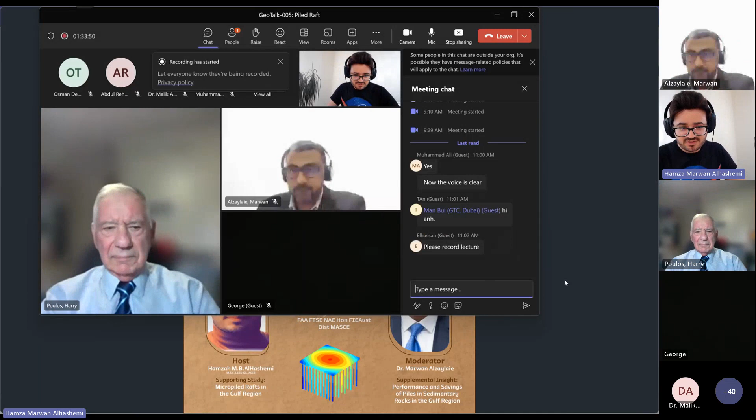Someone is asking for the recording. We already started the recording now, so very good.

2 more minutes to go.

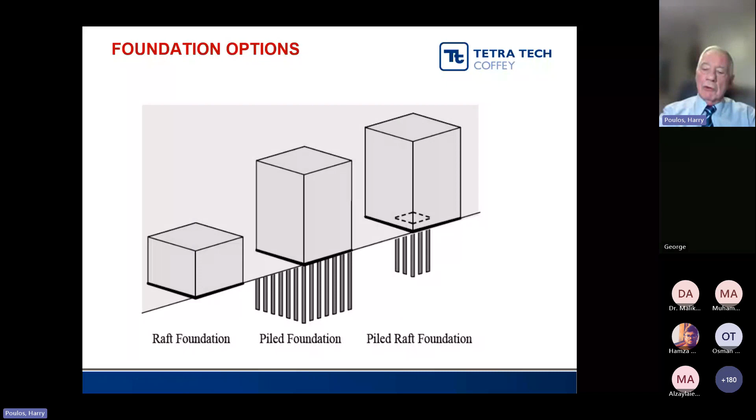Now, the design philosophy tends to be a little bit different from normal piles. We aim to share the load between the raft and the piles, and the piles really take generally the majority of the load, but the raft provides additional capacity, and so we tend to focus more on stiffness and settlement than on the actual capacity of the foundation, because this is often the deciding criterion.

Now, there is another perspective that we can take with piled rafts, and that's to look at the piled raft as a pile-enhanced raft, where we improve its performance by adding a number of piles, and the piles then act as settlement reducers, so that they actually carry the load, and even if the pile capacity is fully mobilized, then the pile can act as a spring and carry some of the load, and so settlement is reduced. So this is the basic way that we can look at it.

Now, the piled raft is not a universal solution to every problem, but there are circumstances where piled rafts are extremely suitable, and that is where the raft itself has a reasonable amount of stiffness and load capacity. This occurs if you have, for example, relatively stiff clay profiles, as they have in the city of Frankfurt in Germany, or where you have relatively dense sands or weak rocks, conditions that you have here in Dubai and in other parts of the Middle East. It's preferable that you don't have a situation where ground movements due to external causes can occur.

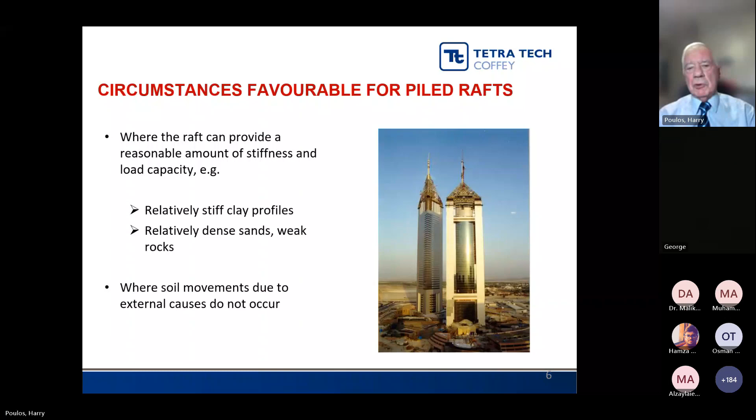So that's circumstances. There are circumstances that are unfavourable, where you have, for example, soft clays near the surface, where there are compressible layers at depth, where consolidation settlements may occur so that the soil may tend to move away. Lifting movements where the soil itself may cause uplift loading on the piles.

So just be aware that we're not talking about a universal solution, but we are talking about a solution that for many cases is extremely favourable, and certainly in your part of the world, these favourable solutions are quite common.

Now, some of the earliest learnings we had were from small-scale model tests that were carried out in the 1950s by Dr. Whitaker. And these two diagrams show the results of model tests where on the vertical axis is the settlement of the model pile group, and on the horizontal axis is the number of piles, the square root of the number.

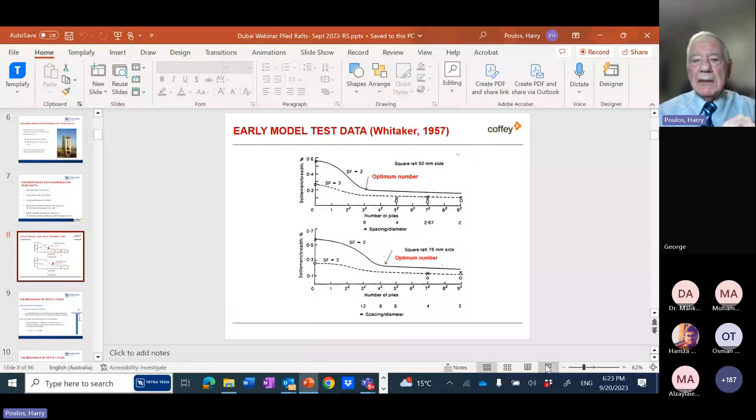Important point here that I want to make, and it is an important point with respect to the design of piled rafts, is that as piles in the group increases, we tend to get a reduction in settlement, which is what you would expect. But there comes a point at which there is little or no further reduction, and that is when the group itself acts as a block. So if the piles are very closely spaced, then really the piles and the soil between them act as a single block. And so there is an optimum number for efficiency of a group of piles or a piled raft. That's an important thing to remember, and we'll come back to that later.

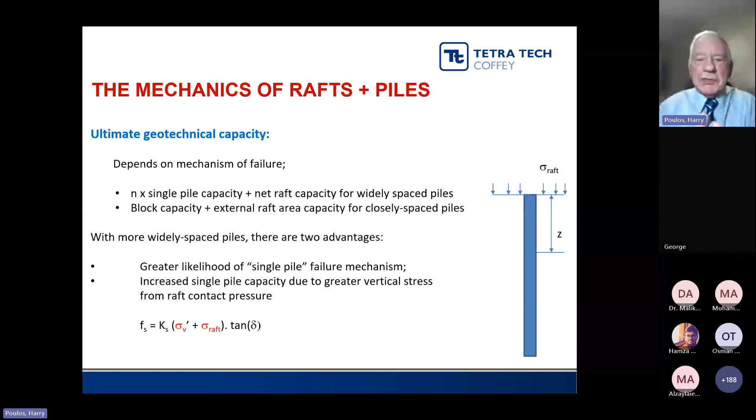Of rafts and piles, first, that the ultimate geotechnical capacity of a piled raft depends - if you have widely spaced piles, capacity is the sum of the single pile capacity plus the capacity of the raft. But if you have closely spaced piles, then the ultimate capacity is the capacity of the block plus any external raft area.

So for widely spaced piles, and this is where piled rafts become really quite advantageous. If you can generate a single pile failure mechanism, you get a greater efficiency of the group, a bigger capacity than you would otherwise.

And another point is that if the raft is in contact with the ground, it will increase the stress in the ground, and it will increase the pressure on the ground, and that will in turn cause an increase in the skin friction.

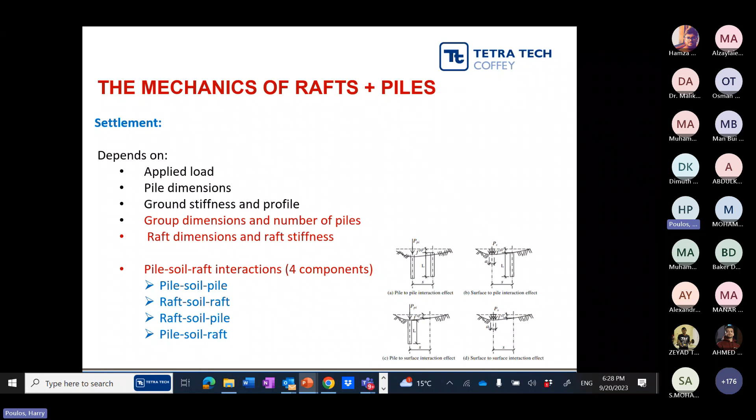It's also very important to understand that we have four interactions among the elements: piles interacting with other piles through the soil, one part of the raft interacting with another part through the soil, and the raft interacting with the piles and the piles interacting with the raft. All of these interactions need to be considered if we're to get an accurate assessment of how the piled raft works. I'll show you later in one of the examples how important it is to take account of all these interactions.

Moving on to design issues, obviously this, as with all foundations, involves considering the ultimate load capacity under the combination of vertical, lateral and moment loadings. Also looking at maximum settlements and differential settlements, and then from a structural viewpoint, looking at the bending moments in the raft, the shears in the raft, and the pile loads and bending moments. So all of these are issues that we have to address.

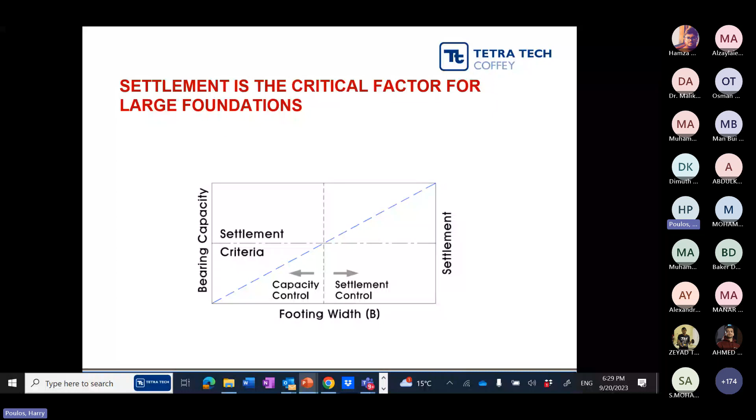Just one diagram here that comes from our Italian colleagues, showing that once we get to relatively large foundations, for example for a building rather than perhaps for a bridge pier, the critical factor for design is not bearing capacity but tends to be more settlement. So we find that the design of the piled raft for normal buildings and larger buildings is controlled by settlement and differential settlement rather than by ultimate capacity.

Now, in our practice, we have various stages of design. We do a preliminary design to try to estimate the number of piles required for both capacity and settlement requirements, and to assess where the piles are best located. Then we get into detailed design, where we refine the pile locations, optimize the raft thickness, and obtain detailed settlement, bending moment, and pile load data.

Here we interact very closely with our structural designers, because they provide us with the loads and we provide them with the stiffness values of the piles and the raft.

Now, in terms of preliminary design, this is when we first start off. We need fairly straightforward, simple methods. For estimating the ultimate load capacity, we generally take that as being the lesser of the raft plus the individual piles, or the block of piles plus soil plus the raft outside the block perimeter. We need to consider the effects of soil layering.

When we're estimating the overall load settlement behavior, we can use simple hand or computer methods, and we can also allow, if necessary, for cases where the piles are fully mobilized, which gives us a means of getting a helpful first estimate of the load sharing between the raft and the piles. This enables us to get an estimate of the required number of piles to satisfy ultimate capacity and settlement criteria.

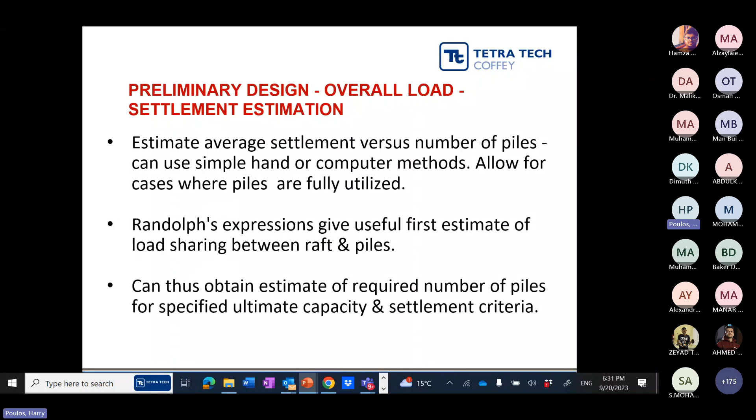Now, we've developed what we call a Poulos-Davis-Randolph method. It gives a very simple approach to getting a trilinear load settlement curve. This requires estimates of the settlement, the ultimate pile group and raft capacities, and the raft-pile interaction factor. Again, with that, I'll refer you to Professor Randolph's 1994 state-of-the-art paper.

This is based on a single unit of a pile plus a segment of a raft, and we can use the expressions that Randolph obtained to get this sort of fairly simple load settlement curve. On the vertical axis we have load, and on the horizontal axis we have settlement. There are three parts to this load settlement curve.

The first part, from the origin to a point A, is where the piles and raft partially behave elastically, so that the piles are working and the raft is working together. When we get to a certain point, the pile capacity can be fully mobilized, and if we load beyond that, the remaining load is carried by the raft, giving a second part of the load settlement curve, until we reach the ultimate capacity of the piled raft system at point B. So that's a very simple trilinear, three-part load settlement curve.

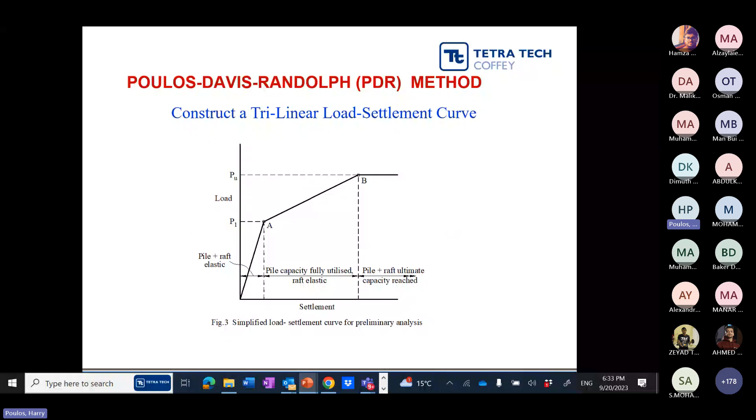This is the one that you can develop with that simple analysis. On the left-hand side, we have the ultimate capacity versus the number of piles for a particular case, and you can see the capacity of the raft alone. As we increase the number of piles, we get an increase in the capacity of the piled raft. At the end, we reach what we call block failure, and then there is no improvement in the capacity of the piled raft if we add more piles.

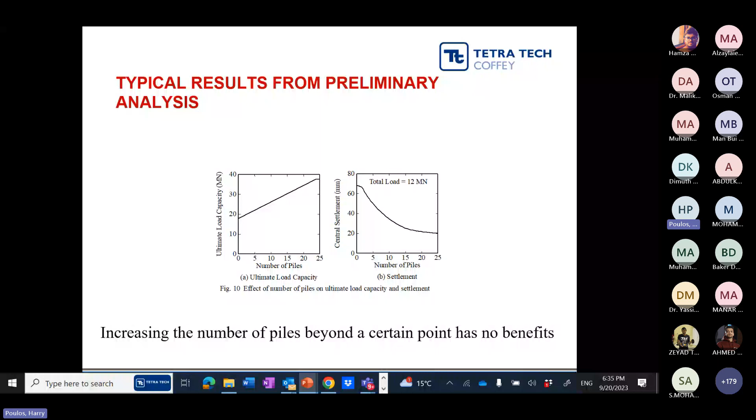We now move on to, again, trying to work out when do we require a pile under a column. And there are four circumstances where you would require a pile.

Firstly, if the bending moment exceeds the allowable bending moment, then it will help if you put in a pile there under the column to help reduce the bending moment.

Where the maximum shear exceeds the allowable shear, so you get what we call punching shear, a pile will be helpful. Where the maximum contact pressure exceeds the allowable bearing capacity of the soil, or where the local settlement exceeds the allowable value, so that you don't have a change in the settlement profile.

And this is the sort of simple case that we analyze, that we have a raft on a layered soil profile, and we need to work out what the maximum bending moment is in the raft, what the maximum shear is, what the maximum pressure is, and what the local settlement is.

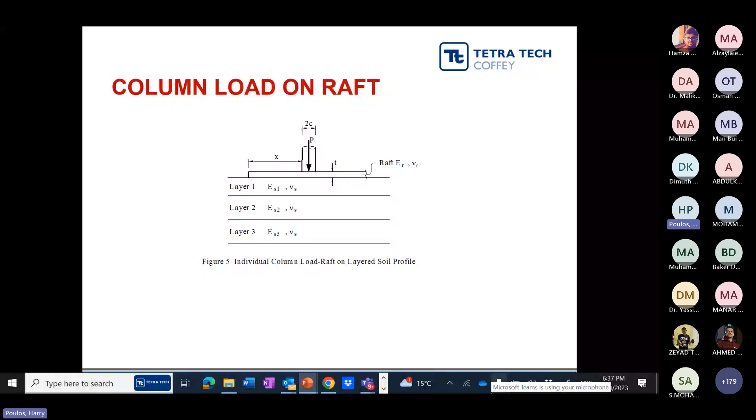And again, limitations. I won't go into too much detail, but those parameters are fairly straightforward: stiffness of the soil, stiffness of the raft, Poisson's ratios, and the thickness of the raft. And then that will give you a characteristic length of the raft.

exceed certain limits. So you can do that also for the shear, the punching shear, for the local bearing pressure, and for the local settlement. And there's a paper I wrote more than 20 years ago, which gives the details of how you can use those charts of Selvadurai to get that local limit.

And so a pile then needs to be put in if the column load exceeds any of those critical limits: shear or contact pressure requirement.

The pile needs to be designed to provide the deficiency in load capacity that the raft cannot provide on its own. And if it's settlement, then the pile needs to provide the additional stiffness that is required to reduce the settlement under that column.

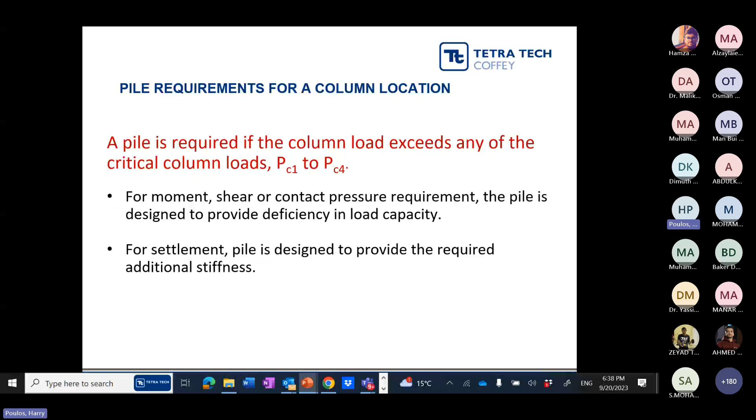Finally, the maximum column load without a pile increases as the raft thickness increases, or as the ultimate bearing pressure increases, or as the soil modulus increases. So raft thickness is in fact very important for local design, and it's something again that our structural colleagues work out.

Now, when it comes to detailed design, then we have certain requirements. To properly cater for interaction between the piles and the raft, we need to be able to consider practical soil profiles, not ultra-simplified ones.

So we need to incorporate non-linearity in the soil and raft, non-uniform loadings, and perhaps different pile types and sizes at different locations below the raft. There are a couple of programs called GASP and GARP that do that.

And each of these involve modeling the raft either as a series of strips, and the piles are modeled as non-linear interacting springs, the stiffness of which we calculate from elastic theory.

There is, over the last 3 or 4 years, a program called ELPLA, which has been developed by engineers, commercially available via GeoTech software. And so that's a very helpful program.

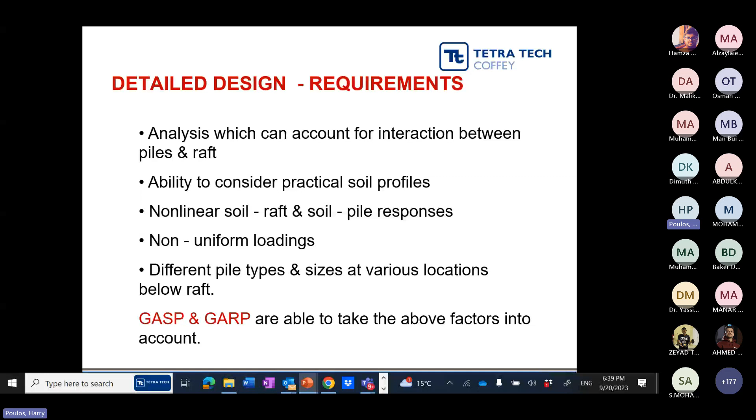Now, just to compare what we get with one of the programs I use, GARP, versus a simpler approach. Here is a simple case of a raft with 15 piles. The full line is the analysis with GARP, and the approximate PDR is the trilinear curve.

You see that you get a reasonably good agreement between the computer analysis with GARP and the analysis with the PDR method. So the PDR method does seem to give a reasonable sort of result.

Now, in the later stages of design, we need to consider that we have a number of rigorous computer methods: FLAC, for example, Plaxis 2D, RS2, and for full 3-dimensional analyses, which are being used, we have FLAC 3D, Plaxis 3D, and RS3.

And as I will show you in a minute, be very careful when you're using 2-dimensional analyses, as they can be rather deceptive and inaccurate. So if you're going to use a complex analysis for a piled raft system, it's preferable to use a full three-dimensional analysis.

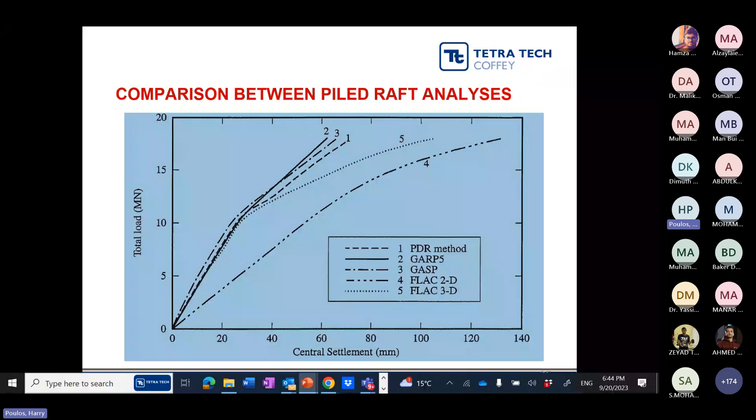Now, very briefly, I just need to mention a couple of other side issues. I've talked so far about vertical loading, and this is often the critical case, but be aware that piled rafts have to resist lateral and moment loading.

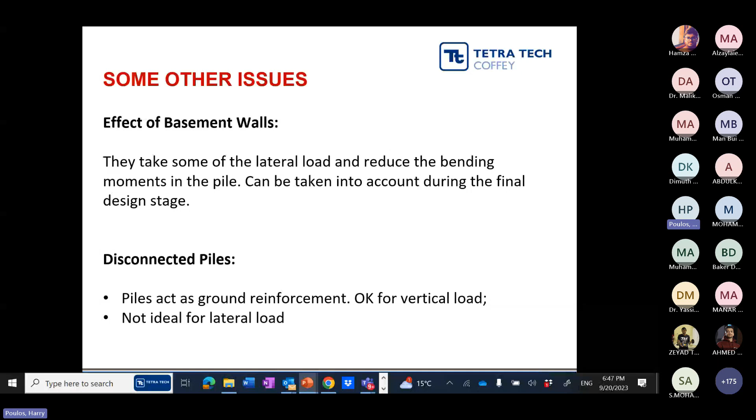Really briefly now to the important issue of geotechnical parameter assessment. The parameters that we need to make decisions on are the raft bearing capacity, the pile stiffness for the raft action, and the soil stiffness for the piles under both vertical and lateral loading.

For preliminary design, often we have to use simple data such as standard penetration or cone penetration data, or if we're dealing with rocks, unconfined compressive strength.

For final design, it's important if you can to do larger scale pile load tests and interpret those to get these sort of parameters. But for preliminary design, these are the sort of correlations which we can use for raft capacity, pile shaft and base capacity, and for the soil modulus for the raft.

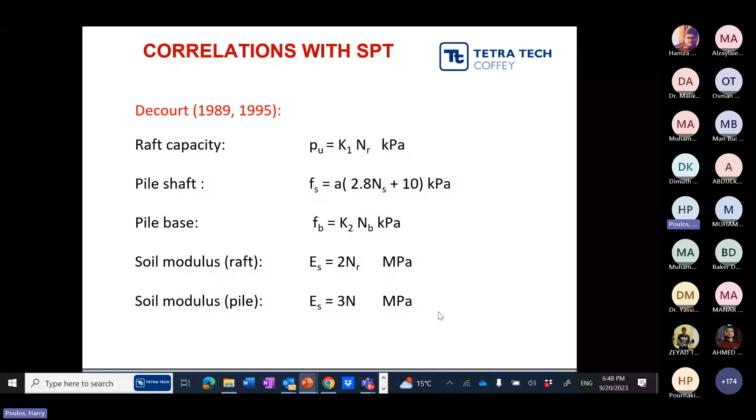Now, just a quick measure to take to reduce risks, not only for piled rafts, but really for all types of foundation design. Ideally, we need to have an independent peer review report and an independent peer review of the foundation design itself. Ideally, we also need independent supervision of foundation construction, because we need to try and ensure that what is being constructed is in accordance with the design intent.

We need to have testing, so pile and barrette testing, and we need, importantly, to monitor settlements during and after construction so that we can compare measured and predicted performance. In particular, if there is a problem, the sooner we identify that problem, the sooner we can take corrective measures. There have been cases, unfortunately, where the realization of problems was done too late, and that has caused major issues and in some cases demolition. So really we need to treat these measures - they cost money, but they should be treated as insurance investments, not as costs.

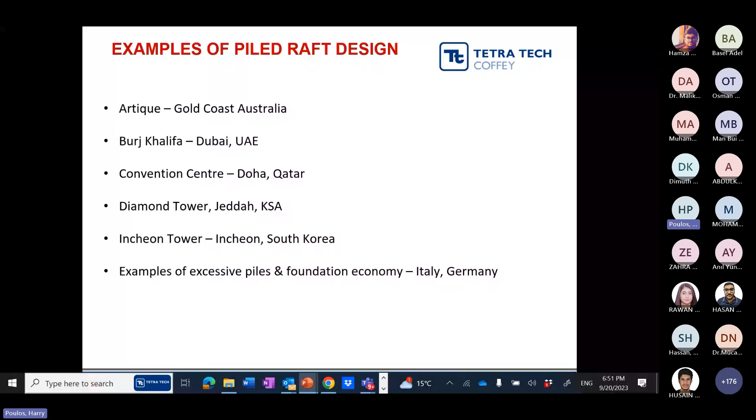So this is the first case, some 15 or so years ago, a 28-story building on the Gold Coast in Queensland, Australia. A structural engineer designed a fully piled foundation with 140 or so piles going right down to rock, fairly long piles, over 30 metres long. We were engaged, in the earlier part of the company's history as Coffey International, to assess the feasibility. Based on the results, the piling contractor engaged us to actually optimize the piled raft design and economize quite significantly on the number of piles.

This is a layout of the foundation system. Again, I won't go too deeply into it, but here is a case of sand and gravel. There was a peaty sand layer here, but the rock was way down at this depth, and that was the original design basis. What we were able to do, in fact, was use piles that were substantially shorter and not bearing on rock.

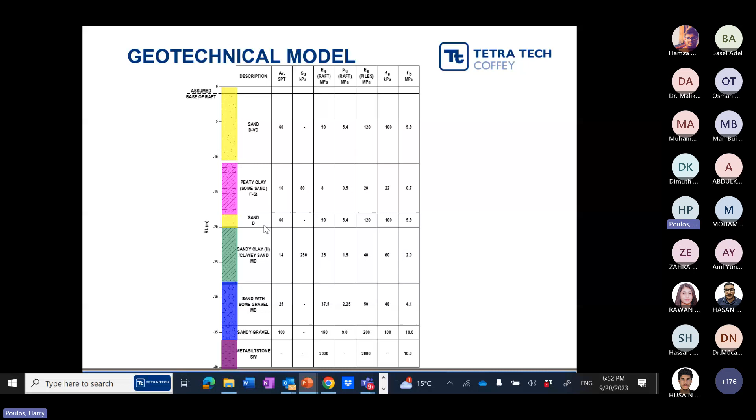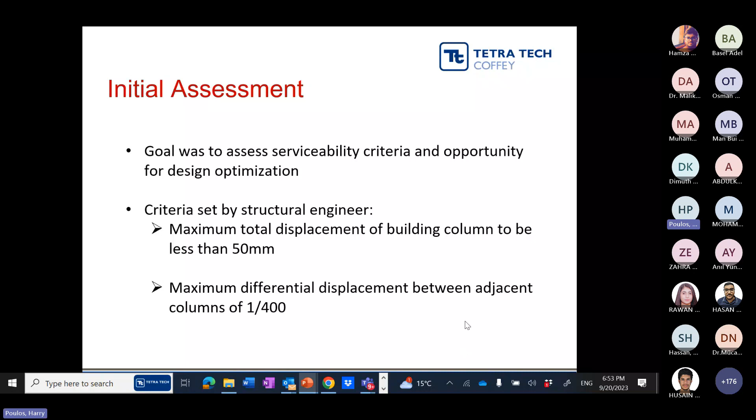And the analysis that we did showed we had a substantial factor of safety in terms of ultimate capacity. So the settlements were going to be the governing issue, and it was estimated between 35 to 60 millimeters. Now it turned out that the foundation was done with a little less than 140 piles, but the length of the piles was about half of the original, around 15 metres. We were given criteria from the structural engineer: a maximum settlement of 50 millimeters, maximum differential settlement of 1 in 400. We assessed the forces, moments, and so on in the raft.

The final solution was a 0.8 metre thick raft, 136 piles - continuous flight auger piles, or auger cast piles - 18 metres long, 0.7 metres in diameter, rated at 2 meganewtons. This is a diagram showing the settlement contours, showing that, of course, we get the maximum settlements as we go out, and from that we get decreasing settlements. But all of those settlements - the maximum settlement was about 36 millimeters, and the maximum differential settlement was equivalent to 1 in 400.

And so the outcome was that by looking at the piled raft option rather than the fully piled option, we reduced the number of piles by 10%, but importantly, we reduced the pile length from 35 to 18 metres - a reduction of over half - giving about a 52% saving in the foundation costs, and the criteria was satisfied.

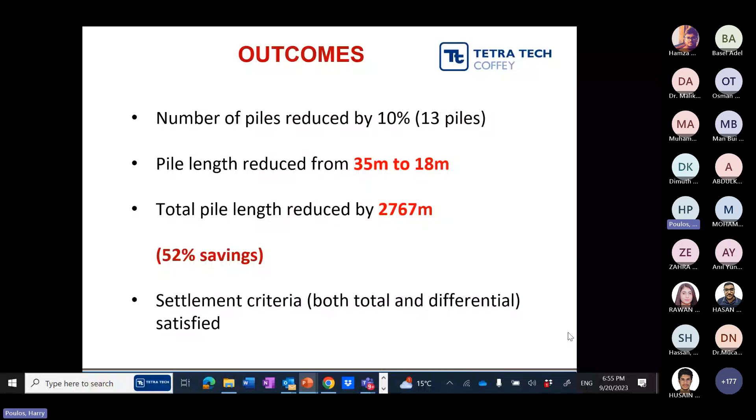The Burj Khalifa - it had a number of challenges some 20 years ago when we started on this. It was to be, and still is, the world's tallest building, which presented challenges for foundation capacity of piles in carbonate soils and rocks. There were concerns about the effect of cyclic loading on that load capacity. And we also had concerns, as we so often do with tall towers, about the potential for difference in the larger settlements under the high-rise area versus the smaller area. So there was a substantial site characterization here, with 30 boreholes.

Many SPTs, and cross-hole tomography, a geophysical technique, which did two things: it provided us with an assessment of the site uniformity - and luckily it was uniform - but it also provided us with values of small strain shear modulus, which we could then use as a means of assessment.

This is a simple representation of the ground, and I think many of you will be aware that...

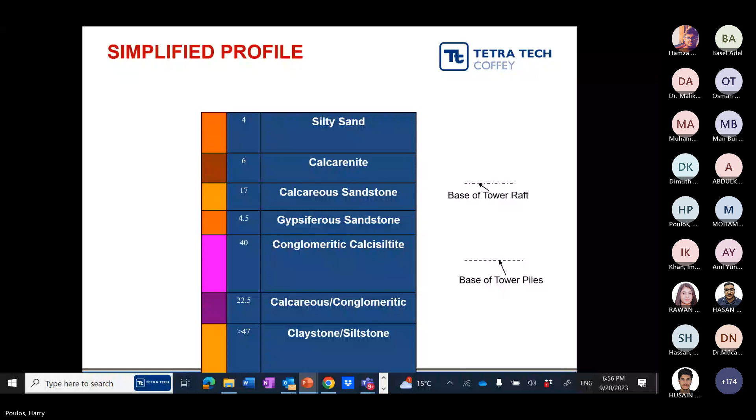Professor Harry, you are muted. Can you unmute yourself, please? Still muted, Professor.

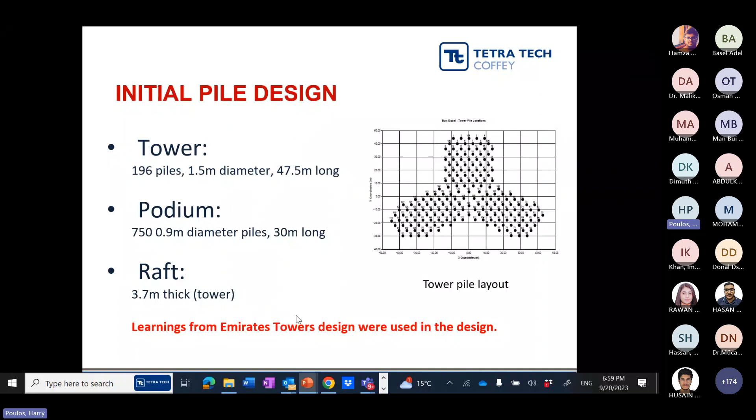Here we managed to make use of learnings from the Emirates towers, where we had overestimated the settlements. So we were able to refine our settlement predictions using those learnings.

Both Hyder and ourselves did independent estimates of the settlement of the tower. Hyder used two programs, Repute and ABAQUS, and got reasonably similar results. We used two of our own, the FLAC program axisymmetric and one of our own programs, and got very similar settlements. Subsequently I did a very simple equivalent pier check and got an almost similar result. I think that independent peer review process gave us confidence to be within allowable bounds.

A load test program was carried out, shown here, with full-size piles of 3 lengths. There was one static compression test with shaft grouting of the pile, a cyclic compression test, a static tension test, and a lateral load test. In all cases, the results exceeded expectations. We had larger stiffness than we had assumed in design, so all of that was very positive.

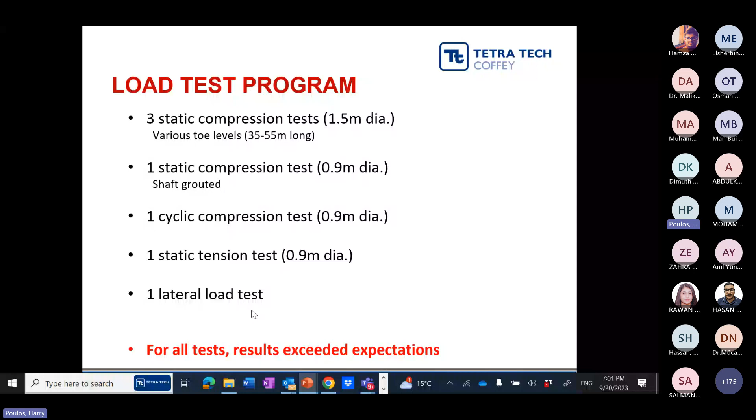Going away on each of the 3 wings, we had decreasing settlements, and the differential settlements were roughly about half the maximum settlement. Remember, this raft is 3.7 meters thick, but because it was so extensive, there was the potential for differential settlements.

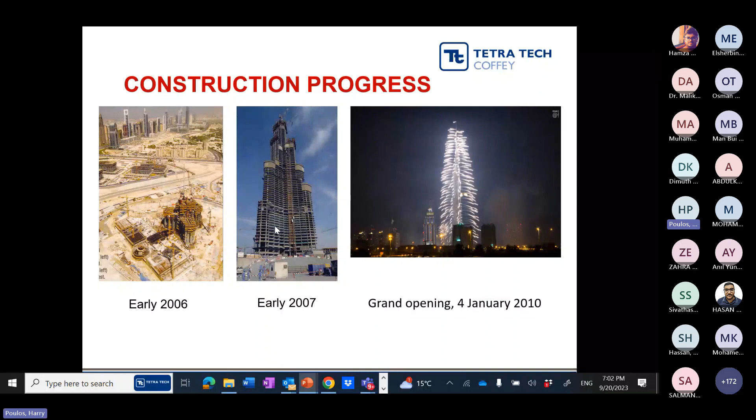And of course, here are pictures of the progress in 2006, 2007, and the grand opening in 2010.

So we carried out a number of analyses. The first was a normal analysis where all the interactions were included. Then we did an analysis just to demonstrate the importance of including all the interactions. And then we did another analysis where we used no interactions whatsoever, but we did incorporate the piles and the raft.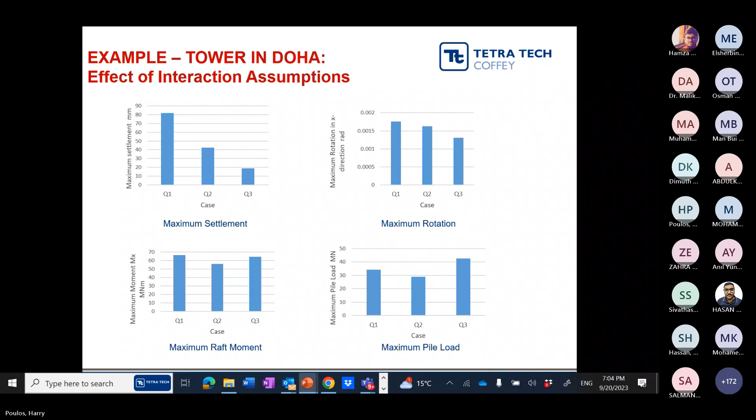This now shows the effect of including the raft into the analysis. If we allow for the raft, then the maximum calculated settlement is about 82 millimeters. However, if we ignore the raft, then our calculated settlement is huge.

The next tower is the Diamond Tower in Jeddah, and we were asked here to try to bring a bit of light on the possible effects of cavities that were identified beneath this tower, and looking at the potential for tilting of the tower. The geotechnical setting in Jeddah is not uncharacteristic of that - you have a lot of limestone, and there tend to be in places cavities.

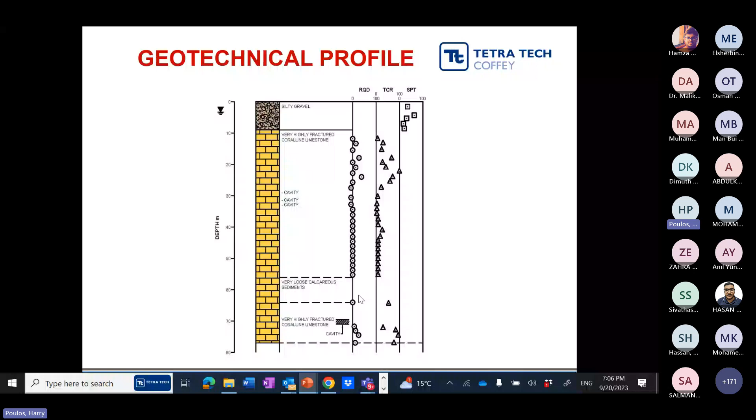So we have a deposit of limestone with random foundation details, and this was designed by others - 0.5 meter thick raft, 145 bored piles, 1.5 meters in diameter, and we had this serviceability load of 2,850. This is the layout of the piles that we were provided with.

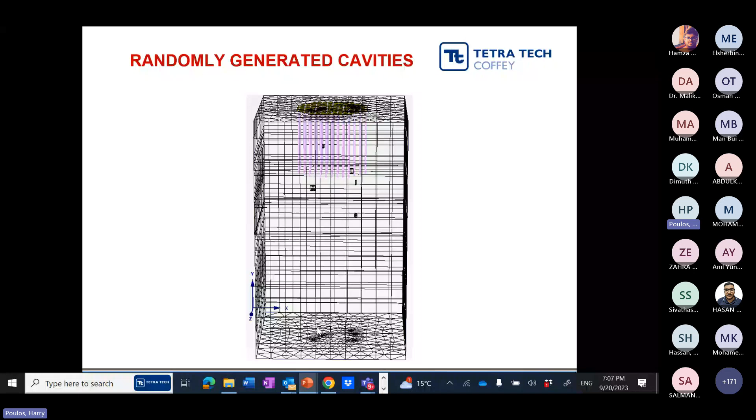What we did here was we looked at the geotechnical data, and then set up a series of randomly generated cavities to try and mirror what was found in the ground investigations. We modeled the size and location based on what we knew from the ground investigation. We then had initial values of the modulus, modified in the light of some data that we obtained.

We then did a series of 3-dimensional finite element analyses, incorporating in each of these analyses, firstly, single cavities - the idea was to see how significant those cavities were to the foundation system. What we found was that there was an extra only 2 to 3 millimeters of settlement maximum. With multiple cavities, the settlements could increase up to about 74 millimeters.

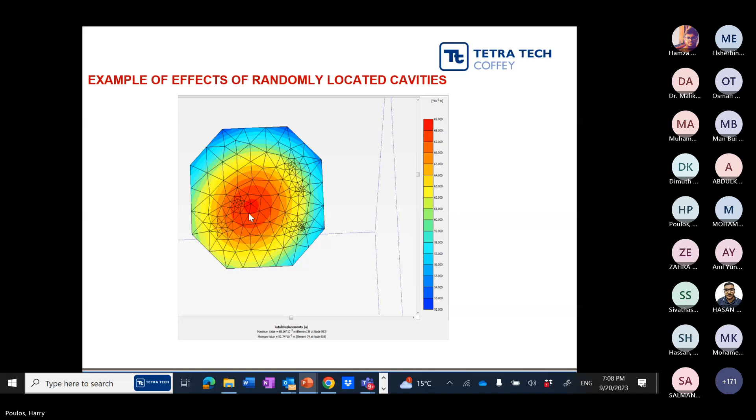But the other important thing was that with random cavities, you now have a non-symmetrical settlement pattern, even though the loading is symmetrical. So here's examples - you see the settlement contours are not exactly symmetrical, they're skewed a little bit, so you get a rotation effect from the cavities. And there is also an increase in the bending moments in the raft, but not a huge increase.

So what we observed from these analyses was that cavities can cause some increases in settlement. A single cavity, a larger number of cavities, a bigger increase. The settlement pattern can be non-symmetrical, but the raft acts to reduce the impact of those cavities on piles - an additional measure of what we call redundancy.

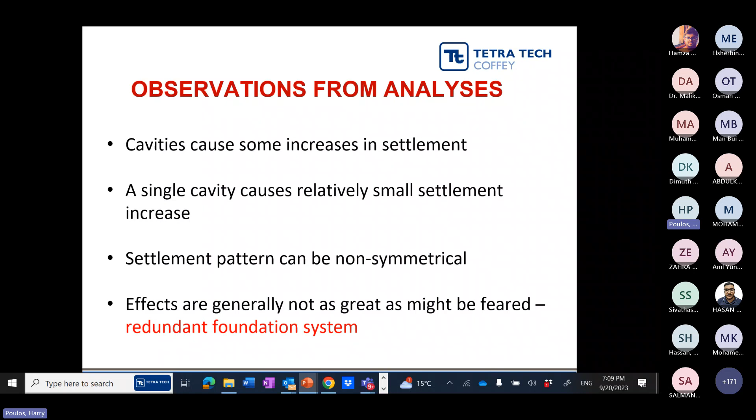The next case is the Incheon Tower in South Korea, which we did for a Korean company, and this was to be the world's second tallest building, 600 meters tall. We came up with a design that looked like this: a central core with 3 wings, 172 bored piles, very large diameter, 2.5 meters, typically long but possibly longer, and a very thick 5.5 meter thick raft.

The challenges here were that this was on reclaimed land, so it was going to have to be reclaimed - it was initially in the ground, in the sea. Also the geology, a very tall building, and limited tolerance to differential settlements. So here is the site when we did the investigation.

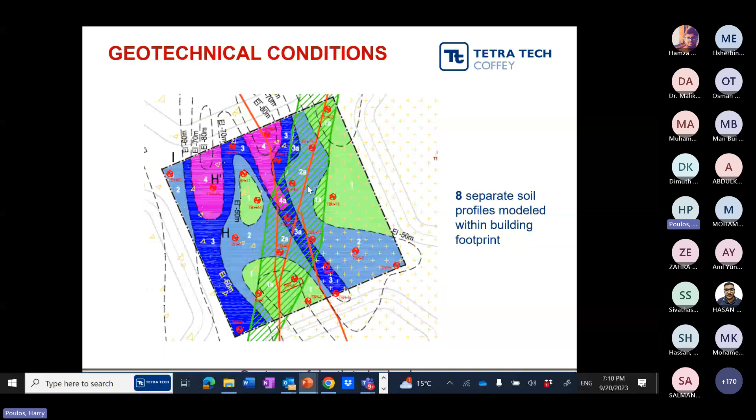So here is the before, and we did a calculation of settlements using a very simple approach initially, using an equivalent pier - in our initial assessment, 75 millimeters. We did the detailed design using the program GARP, and we got 67 millimeters.

We did a final design finite element analysis where we took account of basement walls and of the contact of the raft with the soil, and got about 56 millimeters of settlement. And then the other thing that we looked at was the importance of including the flexibility of the raft.

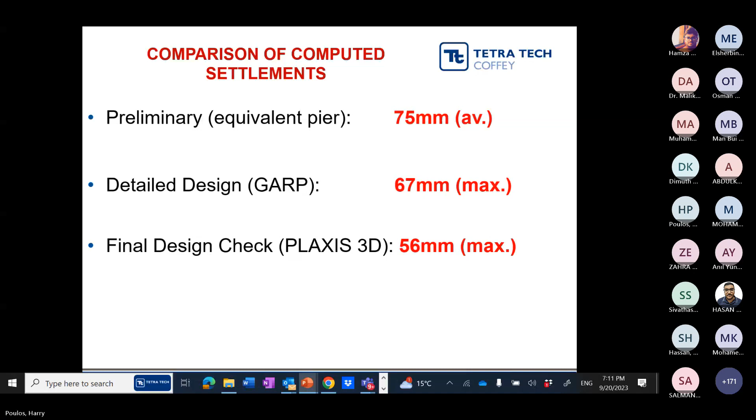Not rigid, because some of the software that we commonly use to design pile groups and pile rafts assumes that the raft is rigid. In the case, if we had assumed that the raft was rigid, the center would have a load of 24 meganewtons, and the corner piles would have a load of 85 meganewtons. If we allow for the flexibility of the raft, then the distribution of load is much more uniform.

The stiffness of the piles is more uniform, and the settlement of the piles, of course, you get a bigger settlement if you have a flexible raft.

You don't have these huge axial loads that the rigid raft provides for you. Now, these are just some pictures, finite element analysis. These can be helpful in us understanding how the system works.

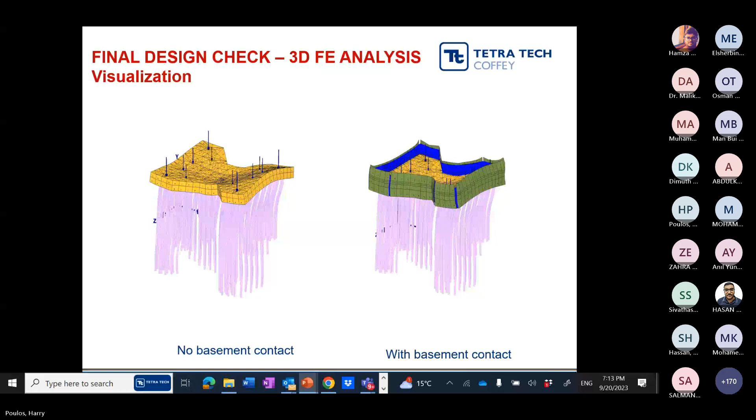Just very quickly, there was some analysis for this, and it turned out that our design assumptions were actually rather conservative. And at the time that we were going to do a redesign, there was a halt put on this project, and that halt has not been lifted. As if it is, we will be able to refine the design of the foundation.

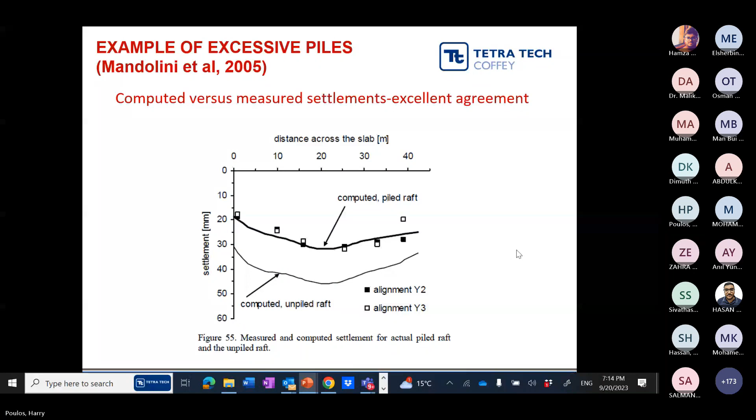If they had the raft significantly greater. But the important thing was this, that when they reanalyzed that foundation system, they found that reducing the number of piles from 637 to 318 led to virtually no increase in settlement. The system has probably twice the number of piles that it really needed to have.

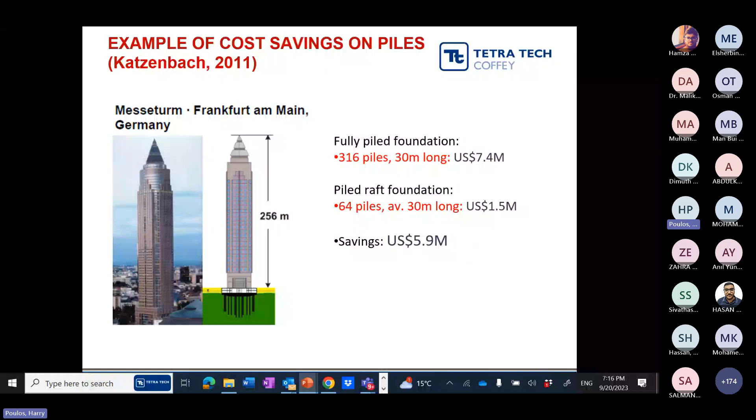In this particular case, for the fact that it was designed as a piled raft, he estimated savings of about 5.9 million. These pair of buildings, hopefully still standing in Kiev in Ukraine, the estimated saving was $3 million US.

So just finally, to conclude, the settlement as the number of piles increases, there is a major reduction in settlement for a relatively small number of piles, but increasing the number of piles beyond that becomes costly. Piles can also reduce the bending moments in the raft if you put them in the right sort of places.

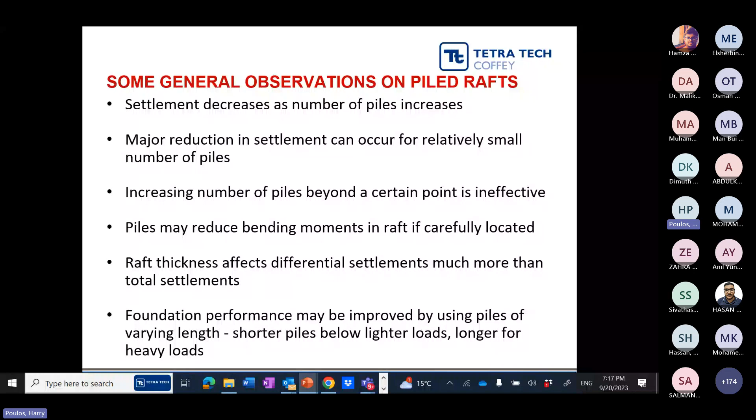So just finally then, my final remarks: piled rafts can provide considerable foundation economy in the right circumstances. And importantly, in these days where sustainability is such an issue, using less concrete means there's considerable experience of successful application of piled rafts, and I think something we generally don't take account of in design is that you can increase the pile efficiency this way.

In effect, you get something for nothing, and that is something that is quite rare. So that's the end of my talk.

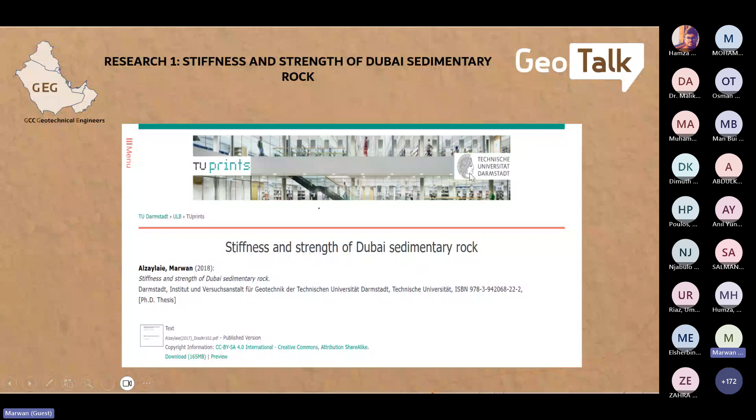So I will start with this one - the research idea - and this is the agenda of the first part. I will be talking about why this idea came and how we came to it.

Usually when we do static load tests here in Dubai sedimentary rock, we found there is a big difference between the calculated settlement using empirical equations and the static load test. From that point, by collecting a lot of data, we found out we should investigate more about this problem.

So we decided to go with this study objective, which covers evaluate, perform, investigate, develop, and provide. First of all, we are evaluating our soil properties and geotechnical investigation report.

Second, we perform comparison between the pile calculated settlement using empirical and conventional approaches, and the numerical modeling with FEM and the static load test. Then we investigate how the single pile performs in the weak rock or Dubai sedimentary rock, and evaluate the Young modulus or modulus of elasticity of the rock.

Then we develop a comprehensive methodology for the analysis and design of the single pile embedded in the weak rock. Then provide a contribution to geotechnical engineers, especially with regards to economical design, foundation design, and green construction.

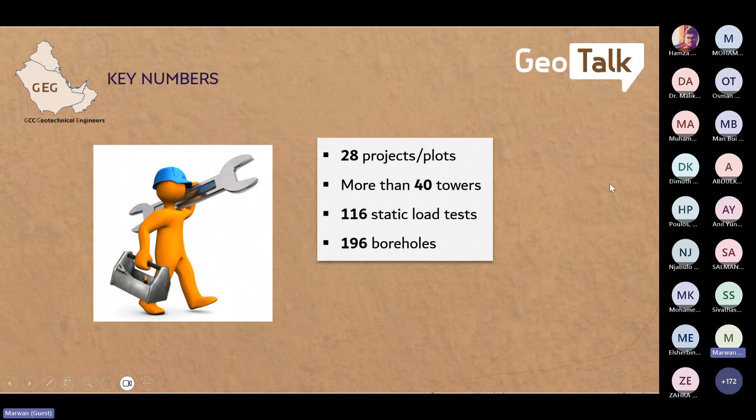This is the location here in Dubai, and those are the plots which we have in Business Bay and Dubai Downtown, not far from Burj Khalifa, where the foundation was designed by Professor Poulos.

This is exactly what we found out - this is the soil profile. In the top 5 to 8 meters, we have sand. After that, we have Dubai sandstone and Dubai siltstone. In this research, we have 195 boreholes, and almost 37 of them are more than 60-meter depth. This is the soil profiling, and this is one of the piles which we investigated.

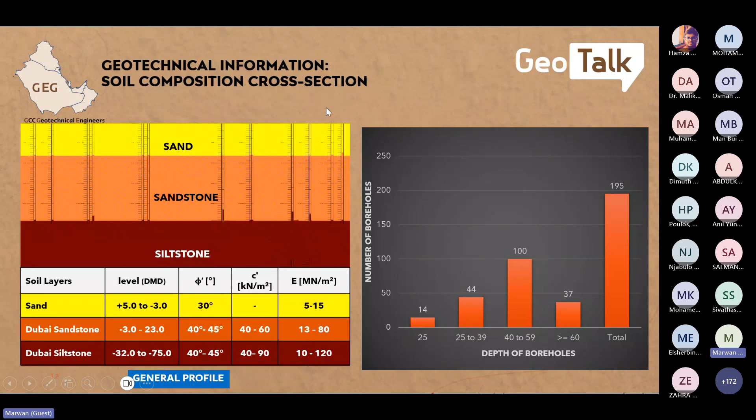You can find out here exactly what the soil profiling is. All the tests, all the piles tested, all 116, are in the rock because of the basement, so the foundation is overlying on Dubai sedimentary rock.

When we did the calculation of the settlement, we did it based on E, which was provided in the geotechnical investigation report or the soil report. Here you can see the settlement, and here also the Plaxis result, the last one. But you can see here the big difference between the static load test and the settlement calculated based on the E, the modulus of elasticity provided in the soil report.

From that point, we decided to move on and do a kind of back analysis. In step 2, we did the back analysis by trying to fit the curve of the FEM model and back-calculated value to find the value of E. So simply we decided to do that.

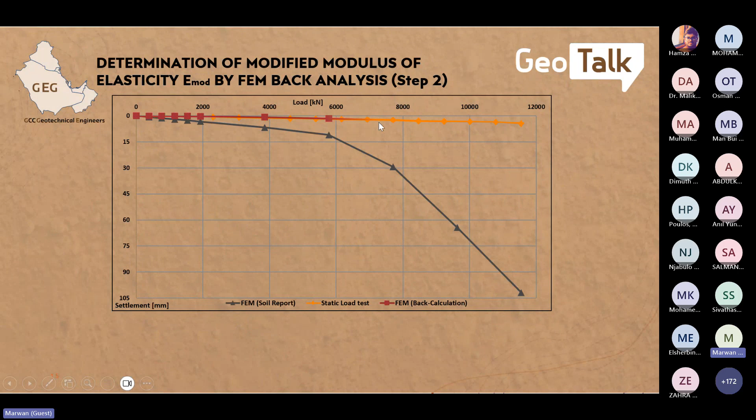So here the FEM based on the soil report, and here the static load test, and here when we applied it, you can see it's fitted 100%, and here you can see the E value which was calculated. So previously we used 60 meganewton, and when we back calculated those values, it was reaching 5,000.

So 83 times the E value provided in the soil report. Then we decided, okay, let us use our new E in step 3, and we decided to use it in our empirical equation as well.

To evaluate and make sure what is fitting 100% or not. But the problem is we still have a gap between the empirical approach by Das, Tomlinson and Bowles, and the settlement back calculated, and settlement from the static load test, even using the same modified E.

So we investigated more and found that the settlement calculated using the empirical approach is divided into 3 types: S1, which is settlement due to elastic shortening. Usually when we use elastic shortening, we use the full length of the pile.

So we decided to go back and see what is the effective length, or the length of pile which is affected by load. We found that the effective length is 11 meters when we apply 150% of the working load, and when we apply 100% of the working load, it's only 9 meters.

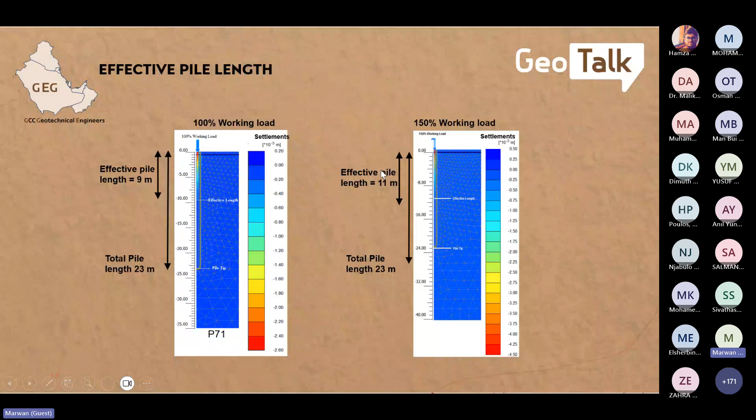So when we correct the value of L in that equation, we found out the following: everything is matching 100%. So even though in our empirical approach we don't have that much problem, the only thing we have to take care about is the value of E.

And when we calculate the settlement due to elastic shortening, we should calculate exactly the length which is affected by the load. Then we did a small comparison to make sure, between the Plaxis and GTS and Midas GTS, and we found they are matching 100%.

So now the summary of the 116 piles. This is the E value provided in the geotechnical investigation report. You can see we have almost between 40 to 60, and the maximum we had was 201 or 220 MPa. Most of the geotechnical investigation labs rely on these equations provided in Tomlinson.

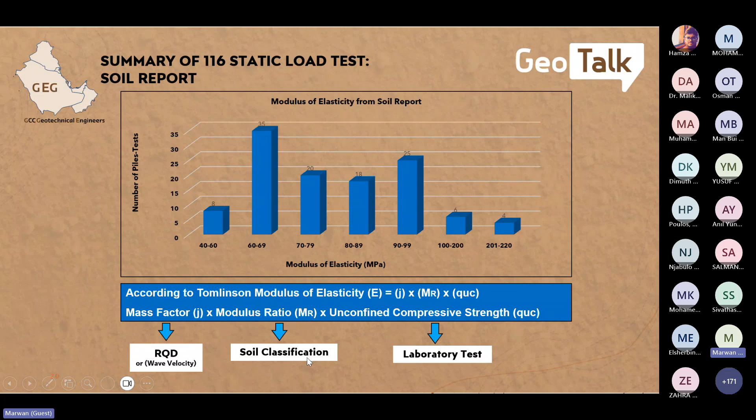Which E is equal to J multiplied by MR times QUC. As we know, the mass factor relies on the RQD, which means there is a kind of human effect on that part. The second one is related to MR, related to soil classification, and the UCS at the end is a laboratory test.

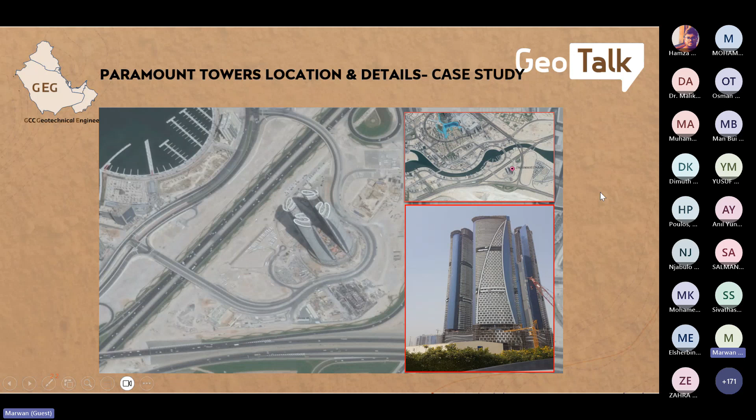We took as a case study 4 towers in Dubai, we call them Paramount Towers, and in that tower we have 5 static load tests, and you can see in all of them when we did the back calculation...

So the previous pile, which was 60, the back calculated value of E was 5,000. The second pile was also 60, which back calculated to 3,000, almost 50 times. The third one was 4,250, and the minimum value was back calculated.

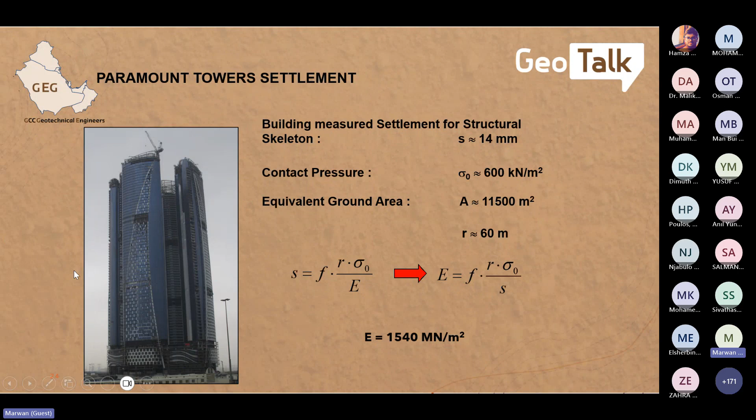1,450. We decided to measure the settlement of the building and try to back calculate it by rule of thumb, and we found the E value for the whole building was very close to 1,540. In this case study, the minimum E value calculated was 1,450, which is 25 times more than the values provided in the geotechnical investigation report.

In this project we have almost 618 piles, and the length of those piles when calculated is 20 kilometers, with 1.2 diameter. So the total pile volume is equal to 22,000. And we could save 10 kilometers of this length if we use the proper E while designing the pile.

And the conclusion we will go for from this case study is that we should take care about calculating the E value relying on the empirical approach. Try to move to something like shear wave velocity or pressure meter to get higher values. Back calculations for the sedimentary rock give a factor 20 times the E value.

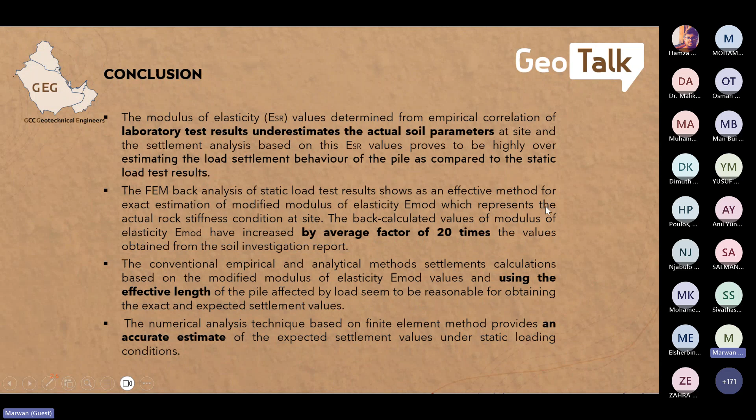Using effective length is very important to calculate settlement, the exact settlement using the empirical approach. Then the numerical techniques are an accurate estimation based on the research we did to calculate the E value, and you can see that the minimum value for our case study was 1,450 MPa. The settlement recorded for the whole building was 15 millimeter for the structural skeleton only.

And now, based on that research, we can say major savings could be done if we just invest more time and try to do our design more accurate by using the back calculation methods.

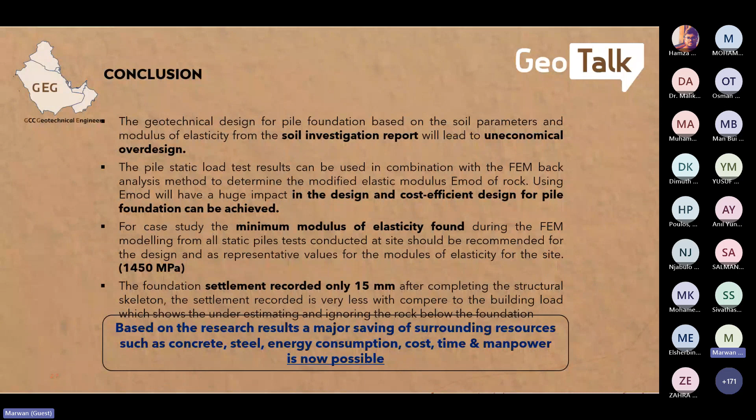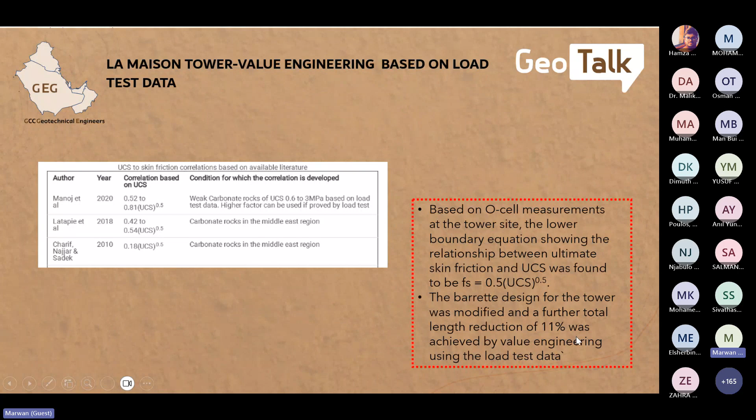Also, we did a lateral analysis for the pile, and again, that research was done with Dr. Omar in Abu Dhabi University and myself, as well as Dr. Ramesh and Akash. We found out in the lateral analysis, using the Broms method, which a lot of contractors and consultants use to do the analysis of piles, you can see how it really gives a huge conservative approach to calculate, for example, the lateral load capacity or the deflection of the pile itself.

We found out that using the 3D finite element with hardening soil for sand for the top layers is helping in that direction. So this is the link for the paper, which will be shared by Engineer Hamzah, and thank you all for listening. Now we will allow Hamzah to present.

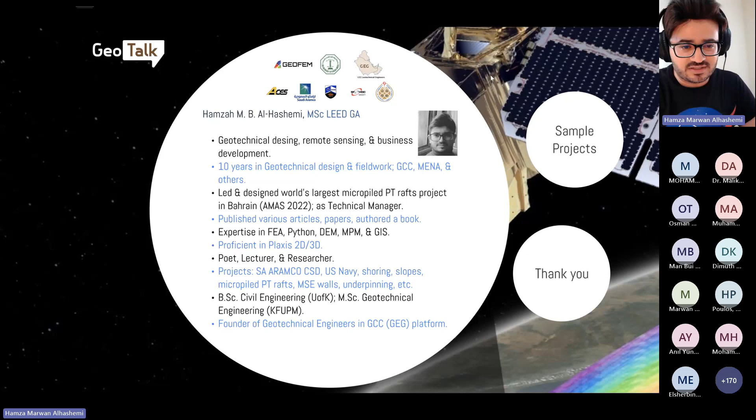So the project of interest I wanted to show you is claimed to be the world's largest micropiled raft, which was completed, the skeleton approximately completed in 2022 in Bahrain. The project was also featured and nominated in the Year in Infrastructure Bentley 2021.

So the site is located on a reclaimed island in Bahrain, on top of a shallow artesian aquifer. It is a public housing development project with a total built-up area for the foundation of 70,000 square meters, with building floors ranging from 8 to 22 floors approximately. The challenges were there: it's a reclaimed island, consisting of reclaimed soils, loose to medium dense usually, with large spans between the columns, massive loadings due to the large spans, and as we mentioned, weak soil and a shallow aquifer that needs to be protected.

Because it's a national preserve for the Kingdom of Bahrain, there's also a need to reduce carbon emissions and consider the cost budget aspects as well in the project, because it's being built in a newly developed island. So all the aspects of green building and green construction need to be considered.

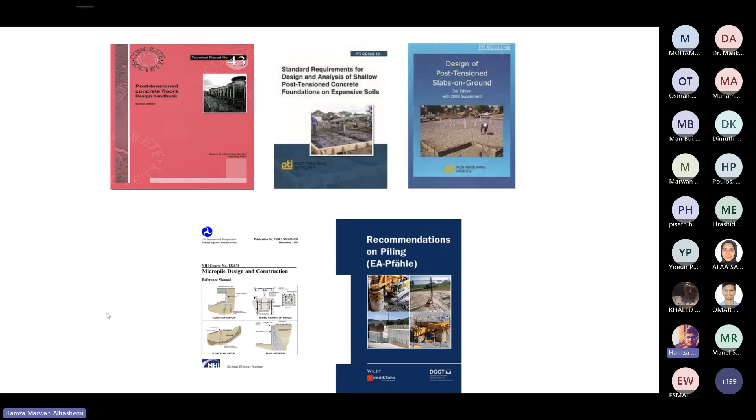These are some of the references we used and adopted: the Federal Highway recommendations on pilings, and PTI publications on post-tensioning foundation elements.

We also did a parametric study on the numerical mesh in the model, to decide the optimum mesh size which has the least impact on the results.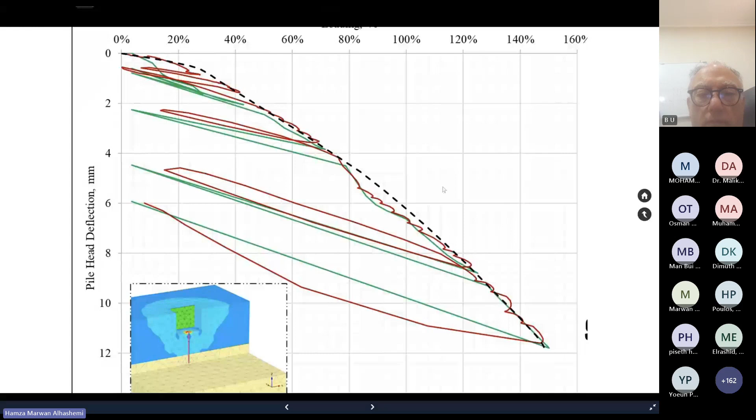As you can see on the chart, we used the micropile load tests conducted on site, and calibrated the numerical model based on these results. The solid green and brown or red curves are from the site, and the dashed curves are from Plaxis after the back calculation, or calibration, of the model.

However, this back calculation of the model was done manually, and it took more than one week to achieve this matching. I worked with another colleague of mine on an optimization tool to shorten that time. We'll show it in a minute.

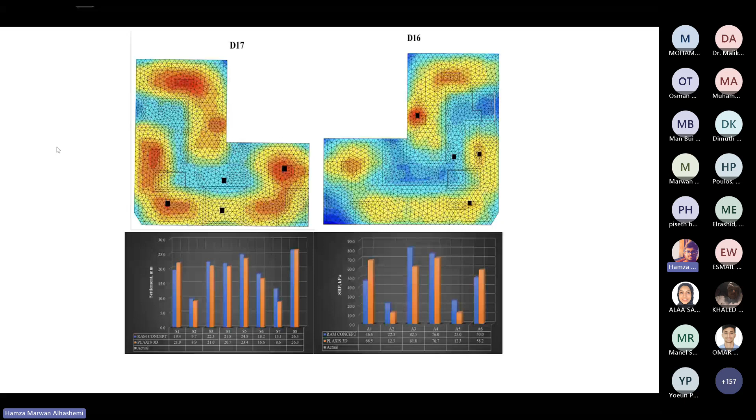These are two of the tallest buildings, approximately 22 floors in height, and you can see the displacement. The maximum displacement was approximately 30 millimeters, and those black dots or points represent the instrumentation we placed within the raft foundation.

With us also today is Engineer Mustafa Jamal, head of structural department at Gulf House Engineering. He has extensive experience in structural engineering in Bahrain and was also the consultant for this project, which I believe he has been overseeing for more than 13 years. It took great efforts and teamwork from everyone involved to realize such a project.

The other project we have done recently with my current employer, Geofem, in Saudi Arabia had challenging ground conditions with problematic soils, sabkha and creep. The interesting part is there were existing bored piles, and we proposed a Micropiled Raft Foundation to support the building. We developed our in-house micropile software to check capacity and buckling. We also used remote sensing with SAR satellite monitoring and historical retrospective analysis for the site.

We took a case study of a micropile test for a project in the Gulf region, using Plaxis 3D and the Mohr-Coulomb model, though this work can be extended to any other constitutive model. We had initial values estimated from the soil reports, since that's always our starting point, as Dr. Marwan said. We estimated a cohesion of 40 kilopascal, friction angle of 35 degrees, and elastic modulus of 5 megapascal.

We developed the automated optimization algorithm after different trials. We started with a method requiring 5 hours to reach the optimum solution, and ended up with a much more optimum method requiring just minutes, I believe less than 30 minutes even.

We achieved optimum values providing a pleasant match between the site and the numerical model: cohesion unchanged at 40 kilopascal, friction angle increased to 43.7 degrees, and elastic modulus of 33.8 megapascal, a huge increment. This is no surprise after seeing what Professor Poulos and Dr. Marwan have shown, that the actual stiffness is usually much higher than what is presented in soil reports, which initially underestimate it.

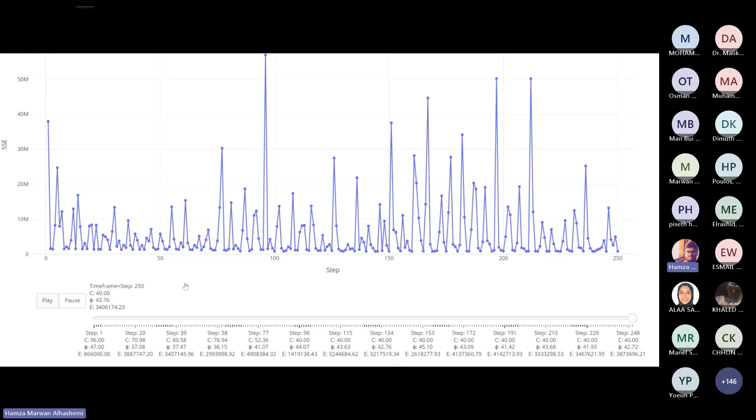This is an output from the optimization algorithm we developed. Every point represents a model, and this is not a convergence curve, just all the iterations we performed. On the y-axis is the sum of square errors. We kept changing the cohesion, friction, and elastic modulus until we found the minimum errors and the most optimum option, and here you can see the optimum solution.

Thank you, you kept it short. If anyone is interested to know more about the optimization tool or use it for your own project, feel free to reach out to me anytime.

Now I think we will take questions and answers. Professor Poulos, if you can unmute yourself and turn on your camera, as well Dr. Marwan. I can see a lot of questions, but first, to break the ice for the panel discussion, maybe we can start with three main questions to direct the discussion. We'll start with Professor Poulos: can you provide insight on the fundamental difference between piled rafts and rafts on piles?

I guess I don't know whether there really is a difference, but piled rafts to me are situations where you have a piled foundation and you take advantage of the effect of the raft in reducing the number of piles. The other way around, an alternative view, is that the piles add to the raft, so you add a distinct number of piles to improve what is really an enhanced raft, using the piles so you put a relatively small number of piles where they will do the most good. You wouldn't use the second option for a tall building, but you may use it for a large factory, for example, where you've got a weak area somewhere—a big slab and then there's a softer area.

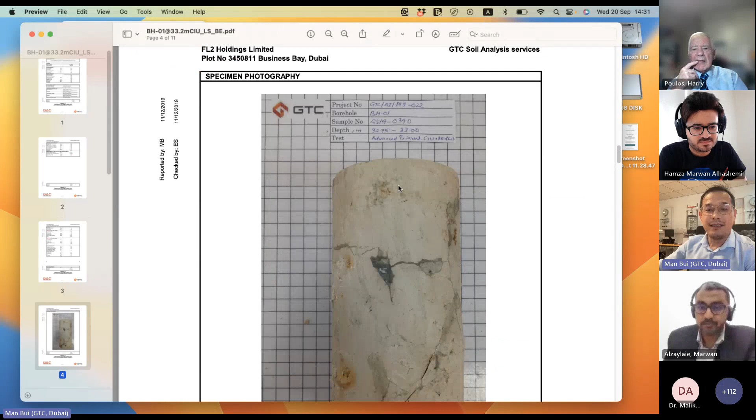Here in Dubai, we set up advanced laboratory tests. We have measured the stiffness of Dubai soft rock using advanced lab testing, including local strain measurement, resonant column, and bender element. I would like to show one example from a test done for Business Bay in Dubai. The rock is consistently tight, as shown in the photo here, and the depth of the rock is about 33 meters, with an effective stress applied of 330 kilopascal.

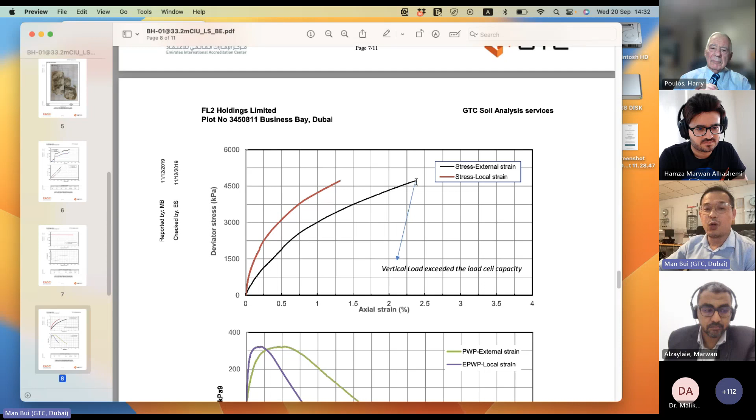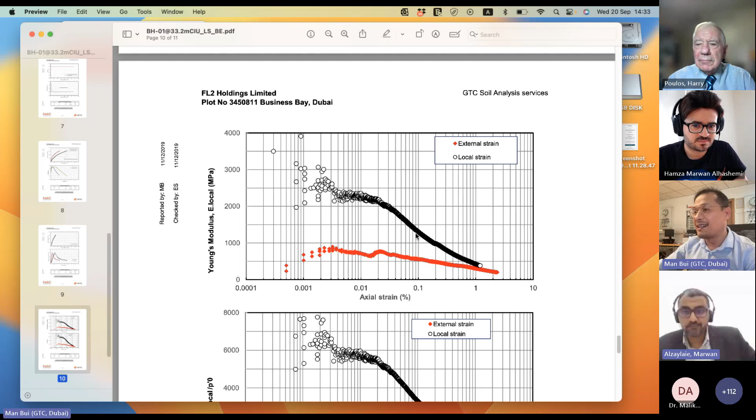And it's much higher than the value that we use in design for Dubai Foundation. It's about more than 10 times. So that somewhat coincides with the presentation of Dr. Marwan. It's a very interesting thing.

And of course, for the external strain, for the standard tests, we also get the stiffness about 500, just 5 times more than the value we use. So it shows how important it is to use advanced lab testing for design.

Just a little bit of investment now, but you might save like in the presentation of Professor Poulos, about $3 million. And of course,

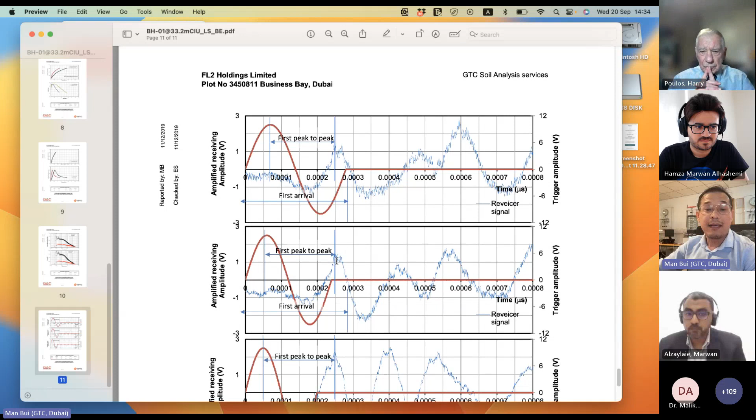for using, we can also use bender element, and the shear wave velocity measured here is about 800 meters per second. And with 800 meters per second, we can work out the small strain shear modulus, about 1,600 megapascal.

And with the Poisson's ratio of 0 or 0.5, you can multiply the shear modulus by 2 or 3, and you can get the Young's modulus about 3,000 or about 4,000 megapascal.

So in the site, of course, you can use geophysics survey to get the Young's modulus, and from that you can get the stiffness, or you can also use advanced lab testing here.

So that's one of the advantages of advanced lab testing, because sometimes in the field, the interpretation of the shear wave velocity is sometimes tricky. You're not sure if the profile is maybe on the left or maybe on the right or a little bit further.

But with the lab measurement, you can anchor the result. So you can get the right value, just a few points along the profile, and you can get the whole profile of the soil stiffness.

Thank you. Thank you for your listening.